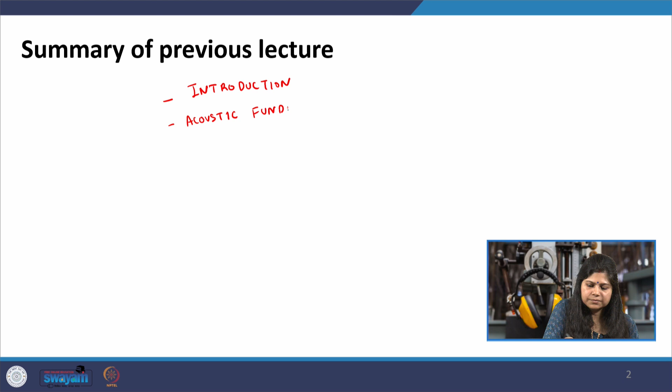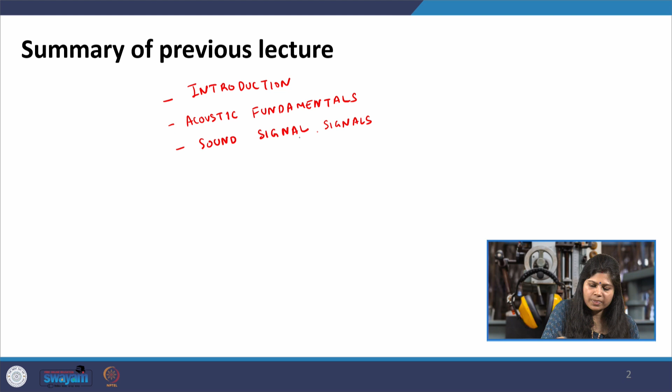So far we have covered various modules. We introduced this course and sound and noise, then some acoustic fundamentals. Then we studied sound signal analysis - spectral analysis, time domain analysis, octave band analysis. Then we studied human response to noise, since noise itself is a subjective perception, and then noise measurement and instrumentation.

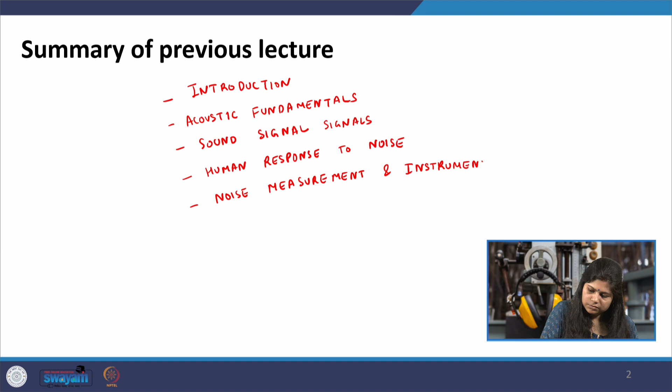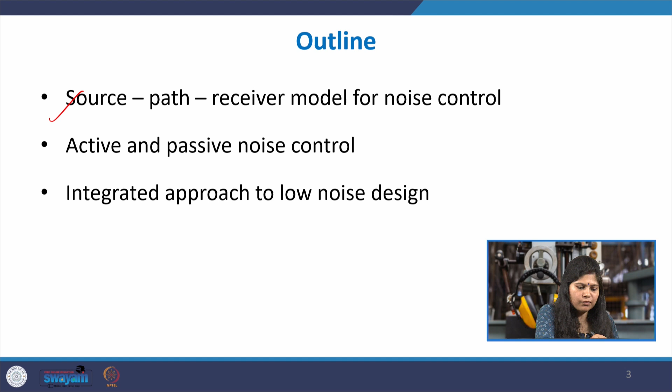Now we will study the principles of noise control. We will study the source path receiver model, then the various categories of noise control like active and passive - I will briefly introduce these - and then the integrated approach to low noise design.

Let us first see the source path receiver model. In general, a typical noise control strategy or the principle of noise control can be described by this model, which is called the source path receiver model.

What it means is that let us say there is some noise source and we want to remove or reduce the noise. The source is there, then from the source the noise is being created. This noise is then radiating either through some structures or through air or various other pathways, and then through those pathways it is reaching the receiver where the noise has to be controlled - the receiver who does not like that sound and would like to control it.

So we have a source from which the noise is generating, some path through which it is travelling, and then finally the receiver, or the person who wants to reduce it.

That means noise control can either be achieved by modification of the noise source, modification of the noise path, or modification done at the noise receiver. These are the three scopes in which it can be done.

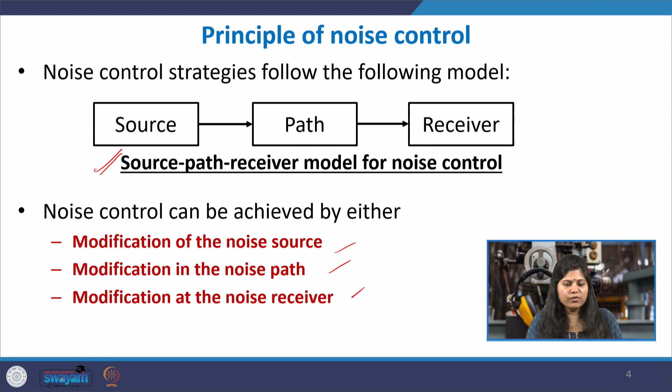Typically for a noise control engineer, the strategy is like this: you always give preference to source modification - that gets the highest order of preference. When source modification is not achievable or out of your scope, then you go for path modification. Once path modification is either not effective or not feasible or costly, then finally you try for receiver modification.

So that is the preference order - you always first try to modify the source, if not possible then the path, if that's not possible then the receiver.

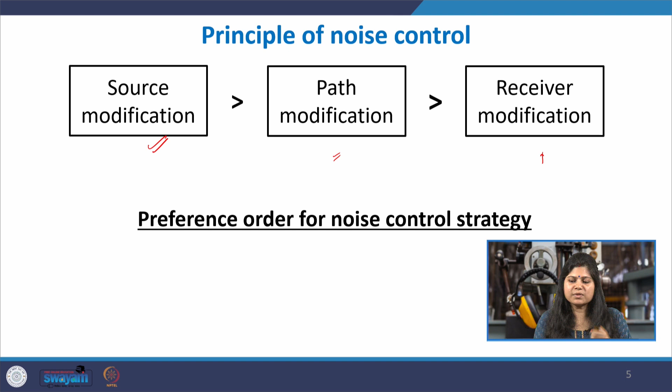So what are the things through which noise source can be modified? The first thing could be you replace the power source with a quieter one. Let us say, for example, we have a combustion engine vehicle - it makes a lot of noise, and the engine being one of the major sources of noise within the vehicle, you replace the engine with a quiet electric motor or batteries.

So you get electric vehicles, fuel cell vehicles like that, and you know that these electric vehicles and fuel cell vehicles are much quieter than the IC engine vehicles. So here what happens - we have modified the power source. Whatever was the source creating the power, due to certain mechanism it was generating more noise. Now it has been replaced with a quieter way of generating the power for that machinery.

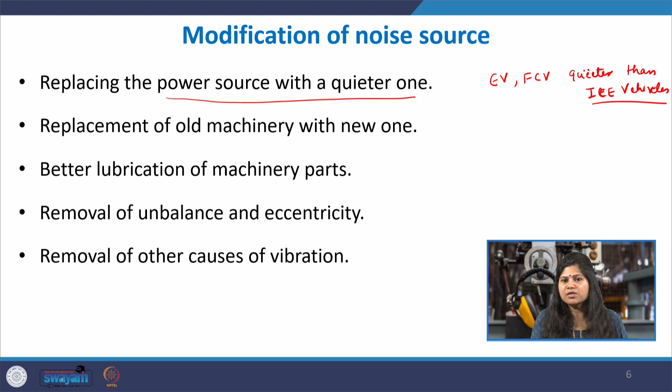The other could be replacing old machinery with new machinery. You see that with time, new machinery usually functions very smoothly - you have better lubrication, smoother parts, better surface finish, and all parts are properly installed and tightened. But with time and usage, the machinery slowly starts to degrade, corrosion happens on the parts, and surface harshness comes in.

Then some parts get loosened up, and as the machinery gets older it starts producing more noise. This happens most of the time in machineries. So once the machinery is too old and very noisy, if you replace it with new machinery, the noise levels are going to go down. Again, this is one form of modifying the source.

Then suppose you have some machinery component - usually noise is created when two parts impact together. In machinery, it could be the meshing of gears or bearings. Whenever two parts are contacting or meshing with each other, it creates a lot of noise. If you provide better lubrication, the impacting between the two rigid bodies is smoother, and the noise generated due to surface harshness or roughness between the two impacting bodies gets reduced. So that also improves the sound.

Let's say I am riding my vehicle. New cars, from the sound itself, you can know the condition of the running car. If the car is not properly lubricated, the engine oil is not there, after a point in time it creates weird noise, once the parts have more friction and abrasion between them. You give proper lubrication to these vehicles and cars, and then you will see that suddenly the sound quality has improved, the sound level has slightly gone down. So lubrication of these impacting or colliding parts which are creating the noise, that also will reduce the noise level.

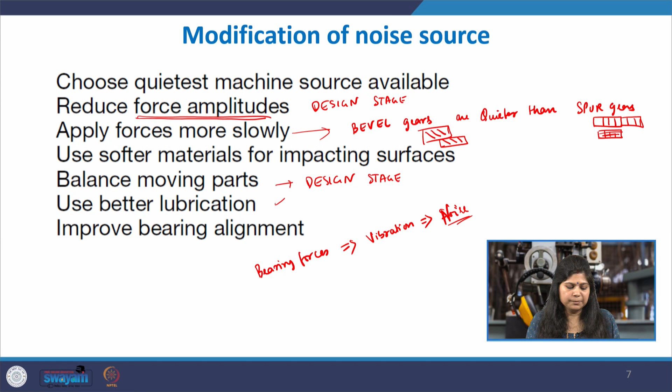In the same way, if vibration is a major part of noise generation, you can use dynamic absorbers that can absorb these vibrations, or use vibration isolators. You can make sure that the natural frequencies of the machinery elements are different from the operational frequencies, because you do not want resonance to set up, as that increases vibration amplitudes. So the natural frequencies should never be equal to or even near the operational frequencies.

You can add dampers to dampen the vibration amplitude, and isolate using various vibration isolators so that the vibration from the machinery to the path gets isolated and does not transmit. You can also reduce the radiating surface area.

Many machineries have large panels, and whatever mechanism generates power sets up a lot of vibration, which then transmits to these panels, and the panels radiate the sound forward. We have discussed how panels radiate sound. So panels can be designed to reduce their surface area, because per unit surface area a certain amount of acoustic energy is radiated. You can add holes or other features so that structural integrity is maintained while surface area is reduced, which then reduces the radiation.

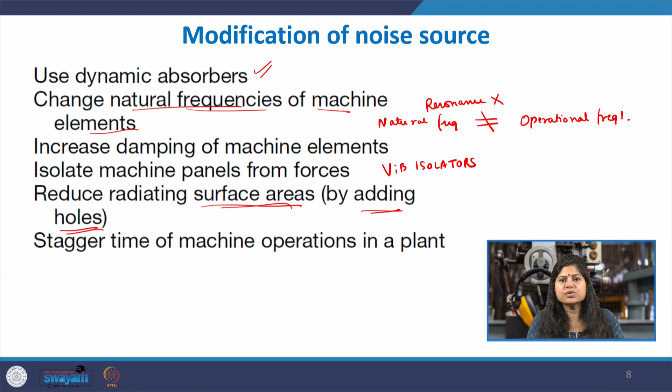In the lectures on radiation through infinite panels, one method discussed was playing with the incident frequency - below the critical frequency there is no radiation. So you can make sure the critical frequency of the panels is much higher than the operational or external frequencies that may excite these panels, and that also reduces radiation of sound from these panels.

You can also operate the machineries not continuously but with breaks, which can improve the performance and bring the noise level down.

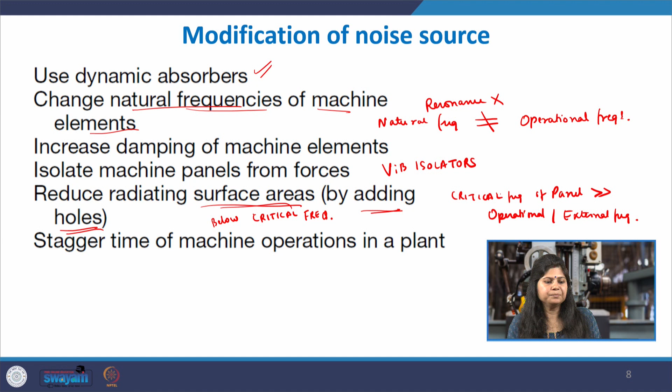Now, what are the methods of modification in the noise path of the machinery? Let us first see what the noise paths are. Usually noise can transmit from the source of the machinery to the receiver either through solid structures or through the fluid medium, which is air. So we have structure-borne noise and airborne noise. Whenever noise transmits from the source, travels through structures, and ultimately radiates into the air to reach the receiver, that is usually structure-borne noise.

For example, let's say I have some heavy machinery which is vibrating and I keep it directly on the floor, or on a stand, and the stand itself vibrates. Say I have a big loudspeaker - instead of suspending it in the air, I keep it on a hard surface. The speaker is vibrating and comes in contact with the hard surface, which is the stand, so the stand itself starts vibrating. The vibrations from the source, the speaker, now transmit to the stand - this is structure-borne sound. The sound first transmits through the stand, then through the floors and walls, multiplying many-fold, and finally radiates onto the air and reaches the receiver.

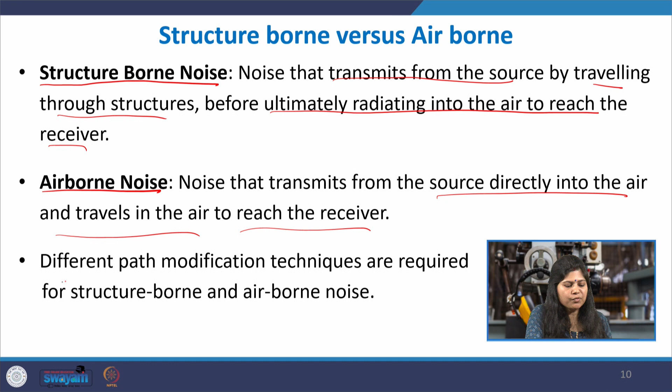In the same way, the other pathway could be directly from the source, the noise emitting directly into the air and traveling to reach the receiver. Based on whether the noise reaches the receiver via structures or via air, you have different path modification techniques for the two types of noise pathways.

Suppose it is airborne sound. You can install barriers, which are materials that reduce the transmission of noise. Let's say this is your source, this is your receiver, and the sound is transmitting through. Suppose you put some hard material that stops the sound wave from propagating - it is a high impedance medium, stopping and blocking the sound waves, reflecting most of what is coming by. It is going to attenuate the sound at the receiver.

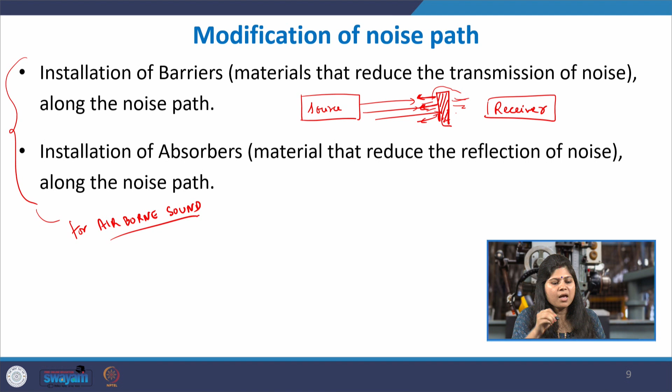You can install such barrier materials, or, suppose it is a closed room with a machinery source and hard reflecting surfaces of the room, and some listener or receiver. The sound reaches directly from the source to the receiver, but since sound emanates in all directions, because of reflections it also reaches the receiver through various other pathways.

The direct sound is getting multiplied because of these reflected waves. So in such a confined environment where reflections are quite significant, if you install absorbers which stop these reflections, you do certain treatment on the walls so that they simply absorb these sounds, stopping the reflections. Then the noise level can be brought down.

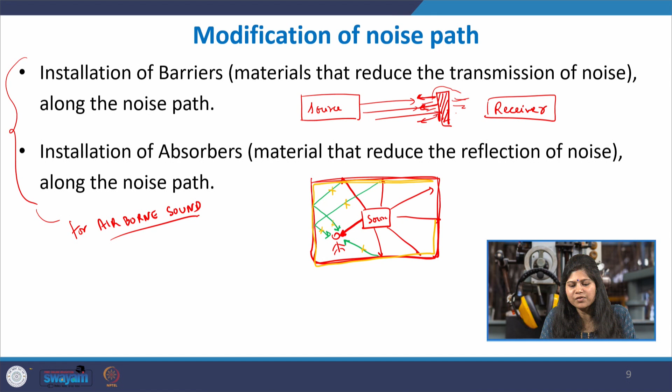So these are modifications in the pathway through which the noise is travelling. Some individual techniques - let us see what happens. I will try to categorize it as structure borne and airborne.

For example, structure borne noise - this is transmitting through the structures in the form of vibrations induced in the structure. You can use vibration isolators. For airborne, let me use a different color coding - green for airborne, and red for structure borne.

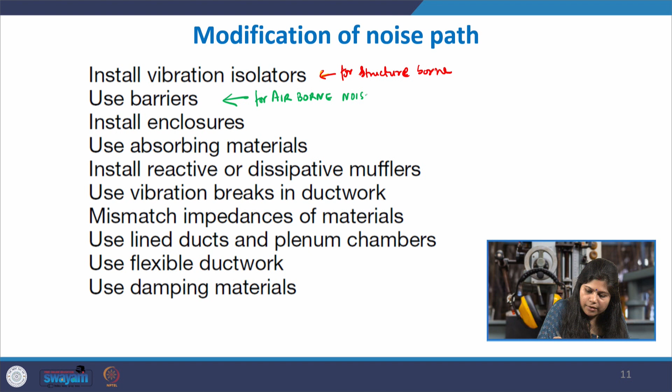Similarly, installation of enclosures is for airborne sound. Absorbing materials again, like in the previous case, is for airborne sound. Use of reactive and dissipative mufflers is again for airborne sound.

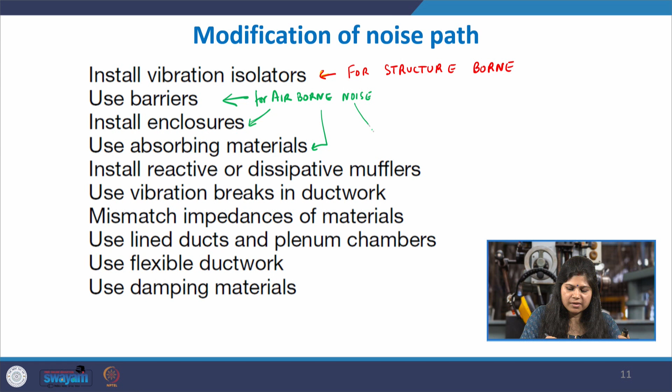Using vibration breaks in the ducts - many times ducts and pipelines are a source of radiation of noise. Instead of having continuous ductwork or pipe, you just have interconnections between these pipes.

So you interconnect the various pipes, or you include some kind of isolations or dampers at different distances in the pipes. You are trying to break the vibration path through which the structure borne sound is travelling through these ductworks.

Then mismatch in the impedance of materials will help in not transmitting noise from one part of the material to the other. Lining of the ducts, use of plenum chambers, flexible ductwork - all of this will stop the structure borne noise.

Finally, if source and path modification is not possible and you want to control the noise at the receiver, then you simply provide ear plugs or ear muffs to the personnel who has to be protected. You can construct a particular acoustic enclosure.

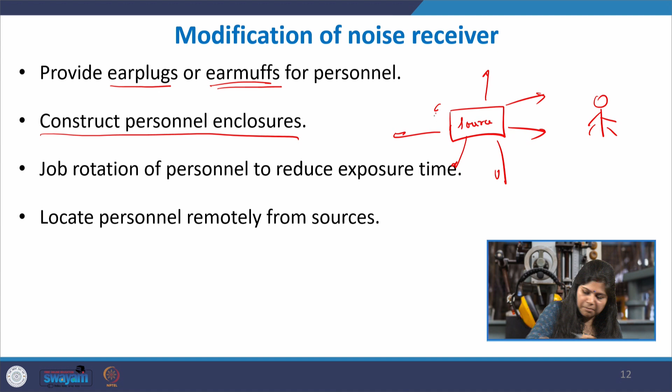Suppose this is a machinery source, this is your personnel, and a lot of noise is being generated by this machinery. You can enclose it in thick barrier material enclosures, so that some form of sound is attenuated while passing into the enclosure - it reflects these sounds so that they do not reach, and they can be isolated.

If in a factory setup you have various workers who have to work on heavy machinery, you can rotate the workers so that not all of them exceed the permissible noise dose limit. Or you can make a factory setup such that all the machinery operates in a single room, with the personnel room further away from these machinery sources.

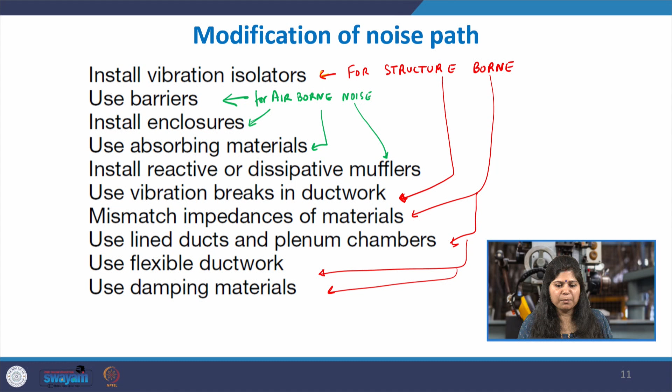So when you begin as a noise control engineer, these are some of the options you have - what you can do for the receiver, the path, and the source. Various options are there and more, but to choose which option to apply for a particular case, you can do noise source or path identification and characterization.

What this means is that you can't do everything. When you have a noisy environment, there are plenty of options to reduce the noise, but because of resource, time and money constraints, you cannot apply all these procedures. So you have to prioritize which one suits your case best. What helps in prioritizing is first identifying the most dominant noise sources.

There are various noise source identification techniques - they are not part of this course, but if you are curious you can read about them. There are techniques like beam forming, holography, and localization techniques, through which we measure and try to identify the most dominant noise sources.

Suppose you have a setup with several machineries. You can identify which is the most dominant noise source, followed by the next, and rank them as rank 1, 2, and so on. Treatment should always begin with the most dominant noise source before moving to the second one. If you have more resources, time, and money left, you move to the next, but priority starts with the most dominant source, because quietening that will be the most effective.

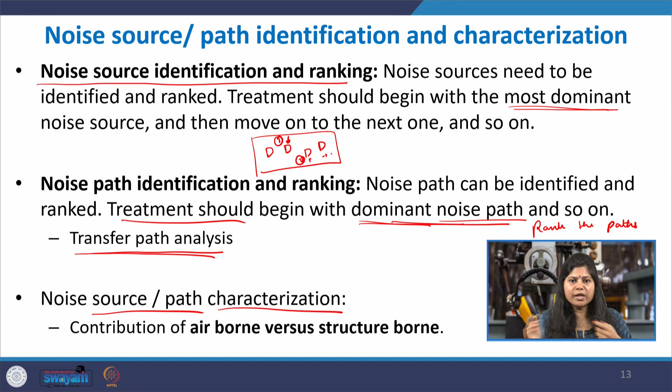Let us take some examples. Suppose we have some machinery installed on mounts. This is some kind of mount or stand for the machinery on which it is set, this is the ground, and we have the receiver somewhere here.

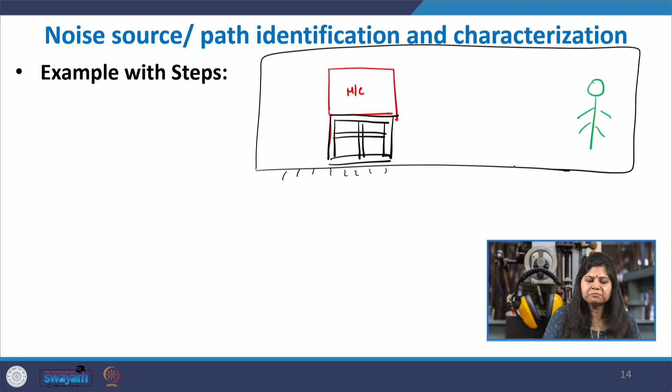First I can do the noise source identification. Suppose here I only have one machinery, so I see this is the most dominant one, with no multiple machineries. So I can directly begin and see what are the dominant paths, using a technique called transfer path analysis, again not part of this course, but a technique through which I find the contribution of the different pathways.

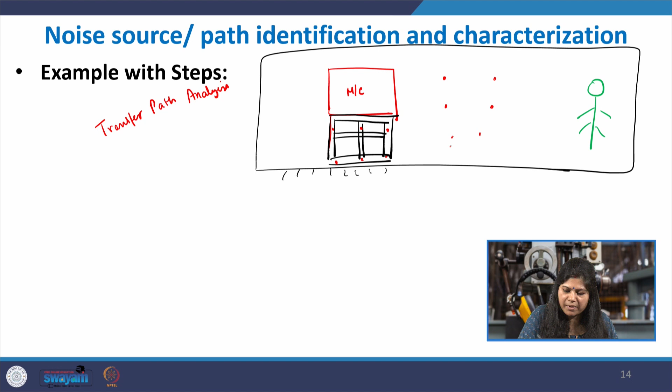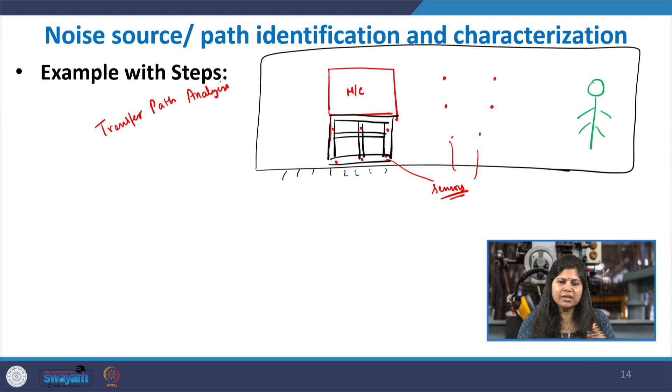I can install microphones at these various identified paths and locations, and accelerometers as well, to measure force amplitudes and pressure amplitudes. Based on the data I can find which pathway is most significant, and on that pathway, if it is structure borne, I put isolators and damping materials; if it is airborne, I install barriers along that pathway.

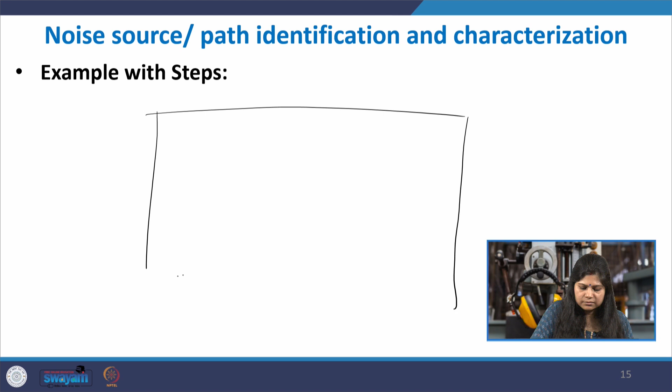In the same way, suppose I have a big factory setting with machine A, machine B, machine C, and a receiver here. Again I can do noise source identification.

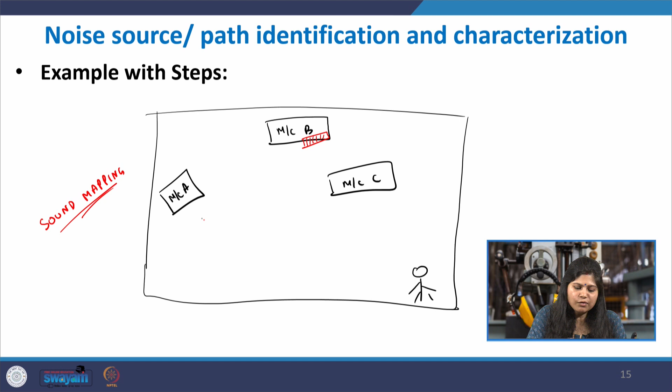I can do something called sound mapping, which gives me an image of the sound field in the area, from which I can know which machinery is creating the most noise, as well as which part of that machinery is radiating the most noise. Suppose I find that a particular portion of the machinery has the most dominant noise emission, my treatment can begin at that point.

Then you identify, if these machineries are mounted on certain mounts, which particular panel or structure is creating the most noise, and what that panel is connected to—whether there is a strand or structure connecting these panels through which the noise is forwarding. Following sound mapping and noise source identification, you can do transfer path analysis to find the ways the noise is reaching the receiver, whether directly, by reflection, or through structures.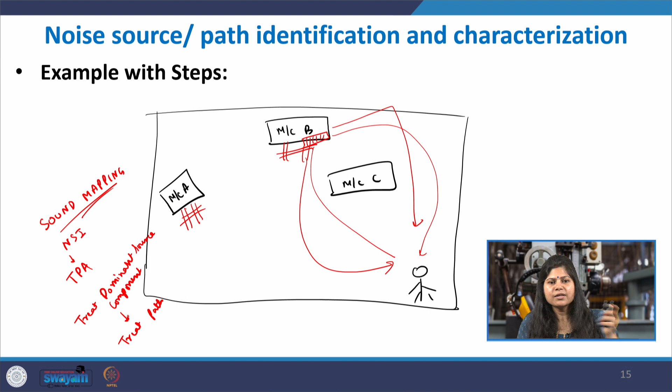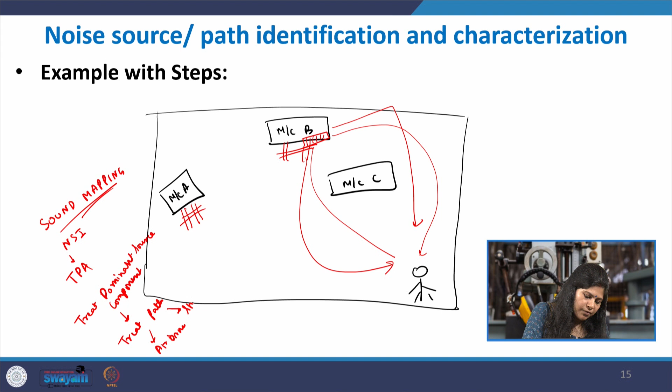You treat the dominant source component using the appropriate technique, and then treat the path, because source modification takes priority. You first treat the source itself, provided you are allowed to and it does not hamper the functioning of the machine. Once that is done, you modify the path based on whether it is structure borne or airborne—airborne techniques for airborne, structure borne techniques for structure borne path modification.

Most of the time, what happens is that noise control engineers are called once the problem is persisting.

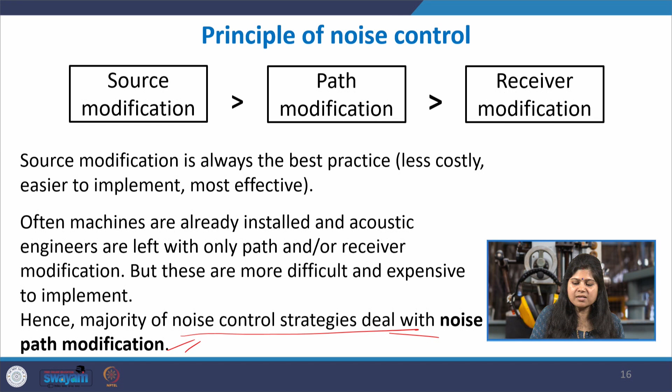So, there is noise in some kind of industrial setup or machinery environment, and a noise control engineer is called in. By then, the machinery is already installed and everything is in place. So the noise control engineer's hands are tied down, they cannot change the machinery because they are not allowed to do whatever they want. They are only left with modification of the path. That is why the majority of noise control techniques cater to noise path modification.

This is some of the recommended noise control strategy based on the source path receiver model. So suppose a general noise level has to be reduced, then the source can be quietened, and isolation and damping can be done to structure-borne sound, absorption for airborne sound, and so on.

If some extraneous noise is intruding into this, then you have barriers and enclosures to contain the noise, as well as some kind of masking you can provide.

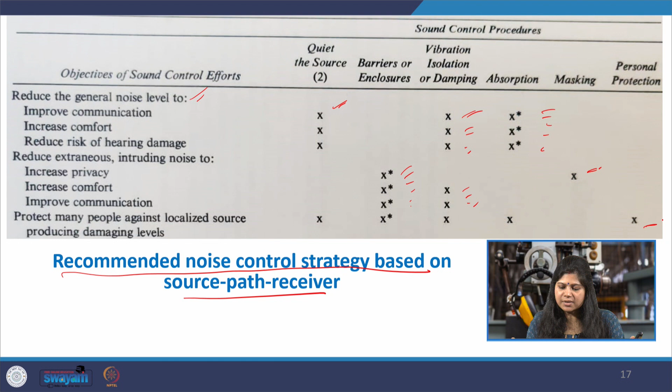Suppose many people have to be protected from some noise level, some personal protection can be implemented. Suppose many distributed sources are there, you can do noise source identification, quiet the dominant source, use barriers, enclosures, isolators and personal protection and so on.

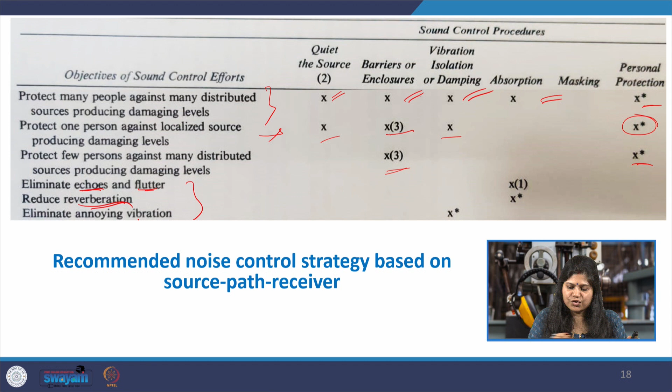For localized sources, again personal protection can be done, along with barriers, isolators and source quietening. For few persons and many distributed sources at damaging levels, sometimes these are more effective. When it is a reverberant environment with lots of echoes, flutters and reverberations, then you can use absorbers as the most effective technique, and so on.

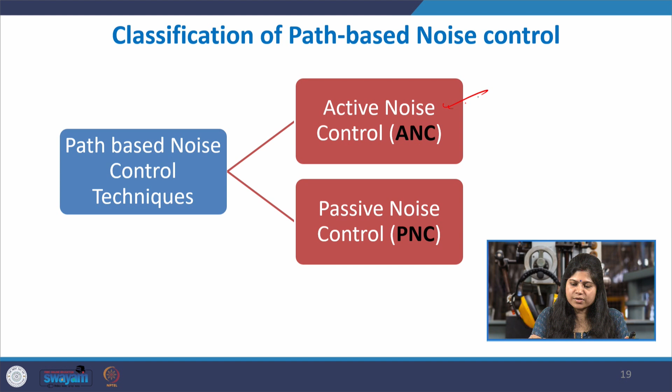So now we know there are various ways through which noise can be controlled: source, path and receiver modification. Now these various path-based noise control techniques are divided into active noise control and passive noise control. We will study active noise control from the next lecture onwards, and then continue with a detailed description of passive noise control.

So here I will just briefly introduce this idea. In active noise control, some secondary sound is added antiphase with the target sound to cancel out the overall effect. Whereas in passive noise control, we do not add additional sounds; rather, we add various materials to block or absorb the sounds.

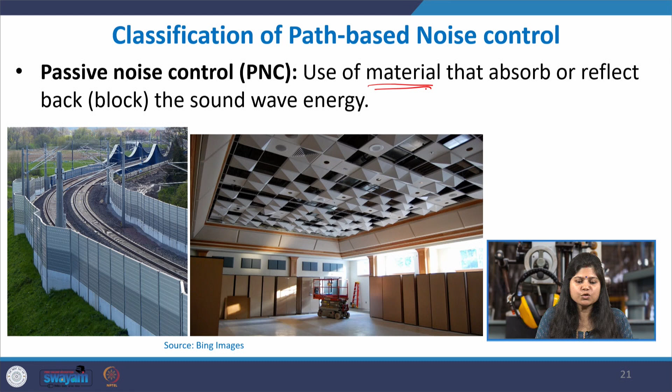The advantages and disadvantages are that ANC can be used for low frequency more effectively; it is more effective for low frequency, whereas passive noise control techniques are very difficult for low frequency. So low frequency is a challenge for PNC, whereas ANC achieves that.

ANC is in general more effective because you are introducing a secondary source which ideally tries to completely cancel the sound present in the fluid medium. So it definitely goes ideally to zero. This is more effective compared to the passive noise control technique.

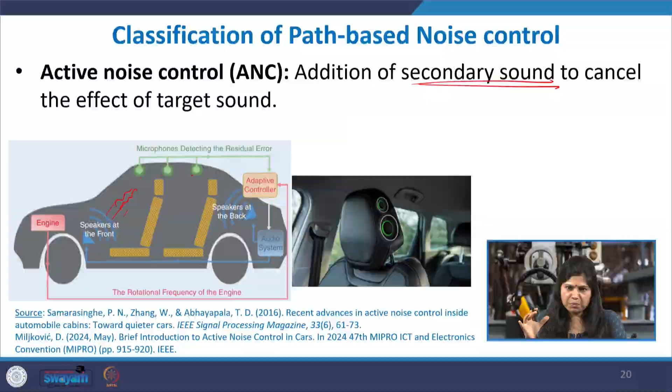However, ANC depends on various kinds of electronics and circuitry, whereas passive noise control requires no complicated electronics and circuitry. So this is a negative point here, and the control is non-uniform across space. Depending on where your electronic circuits are, you take your microphones and try to produce noise through the speakers, and this noise tries to cancel the other noise. So the effect is very dependent on space, very non-uniformly distributed, whereas in passive noise control there is a uniform effect. ANC is more costly, and passive is less costly.

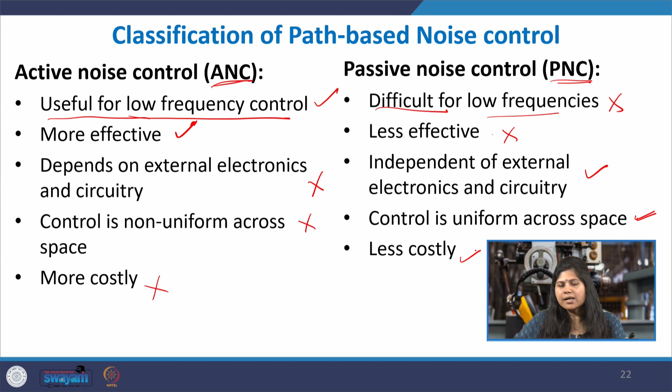So we will study all of this from the next lecture onwards.

Finally, I would like to close this lecture by saying that noise control engineering is essentially becoming an integral part of any kind of manufacturing and machinery design stage. So suppose you have any company or product that is being made, or machinery that is being made, you usually have a design team, engineering team and materials manufacturing team that work together. They work in a very collaborative environment to come up with a foolproof design and manufacture that particular machinery effectively.

They also collaborate with the finance team so that the cost of developing the machinery can be minimized as much as possible, to increase sales and profitability. The sales and marketing team and customer relations team ensure that the product is saleable, there is demand for it, people are attracted to it, and a lot of such machinery products can be sold.

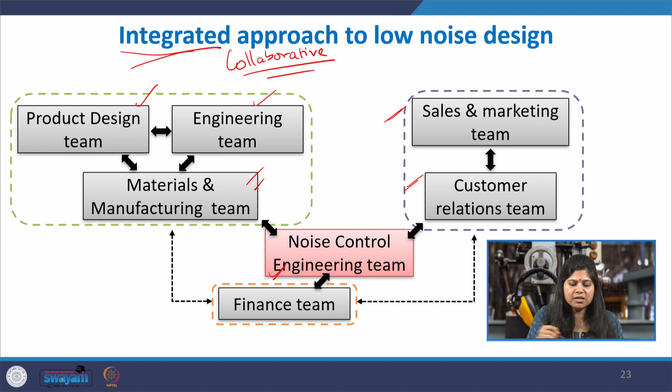So this is essentially the setup in any kind of supply chain or design, manufacture and sale of any kind of machinery. Noise control engineers are also finding a place in this setup, and there has to be an integrated, more collaborative approach. People cannot work in isolation, so they need data from all the different clusters in a typical setup. With this, I would like to close the lecture. Thank you.